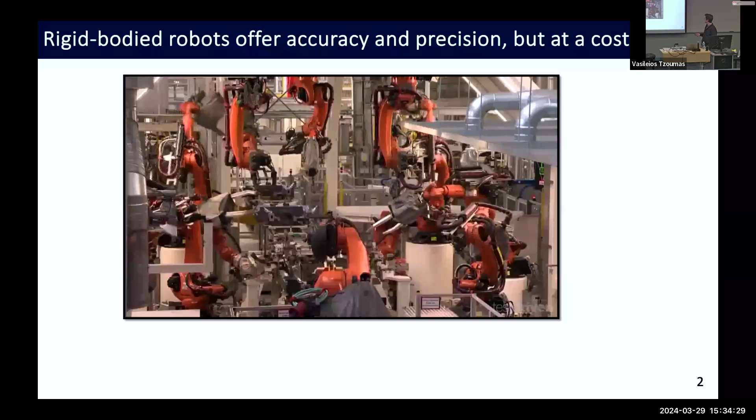But those same robots, if they malfunction in the presence of a human, have the potential to cause serious harm and injury. So practically speaking, in these industrial settings, we physically separate the robots from the humans so that things like this don't happen.

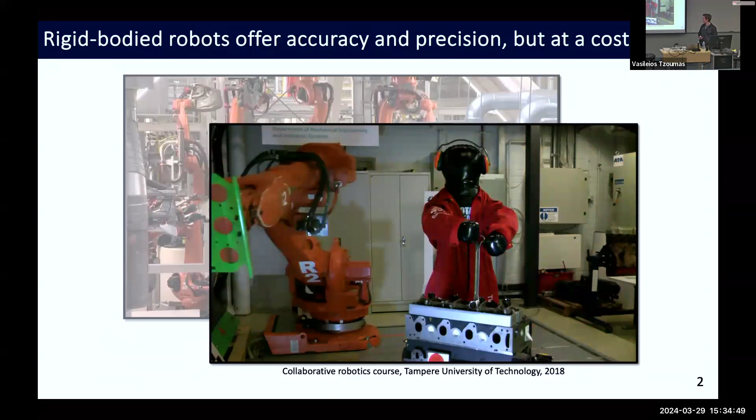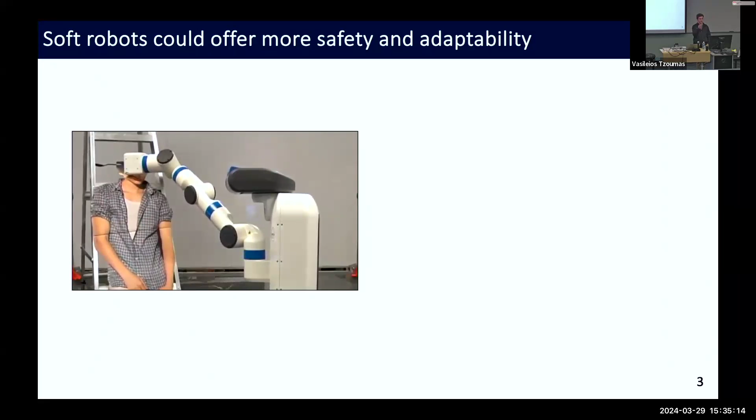But of course, if we want robots to help us in our day-to-day lives and automate things outside of the factory floor, we need them to safely operate side-by-side with humans. So again, if we take a rigid-bodied robot with low backdrivability and try to do a task like feeding someone, if the robot has a perception or control error, it has the potential to injure the person it's trying to help.

A different way of constructing robots could be to make them out of soft, compliant materials, so that even in the event of catastrophic controller failure like this, you don't have to worry about the robot causing serious harm to the person it's operating with.

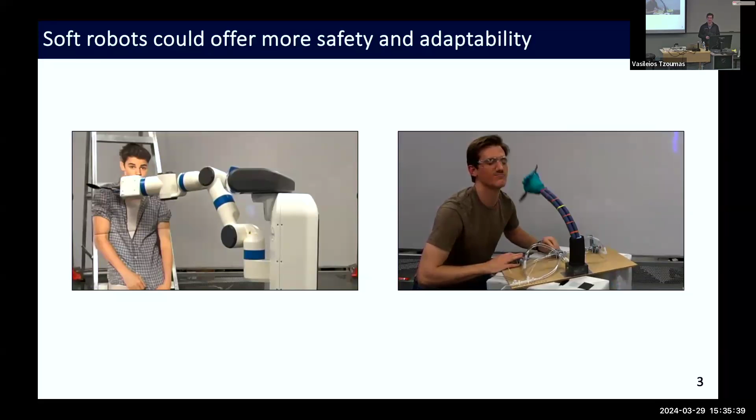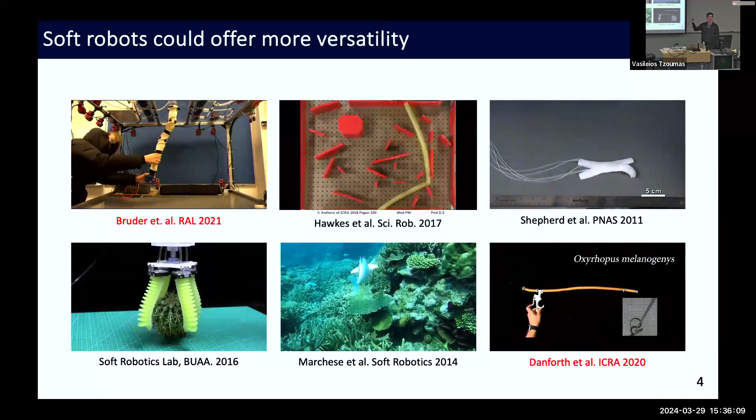So safety is one big potential application for soft robots, but that's just scratching the surface. There's also a lot of tasks that compliance is helpful with, where soft robots have the potential to do better than rigid-bodied robots. Beyond just interacting with humans safely, they can do things like navigate through their environment through physical touch, things we usually try to avoid with heavy rigid-bodied robots.

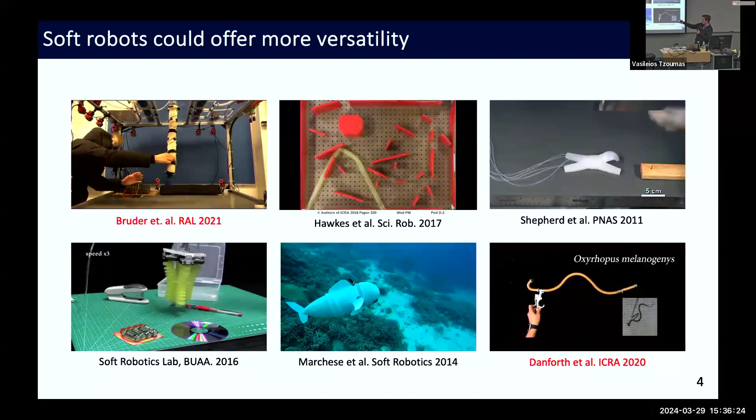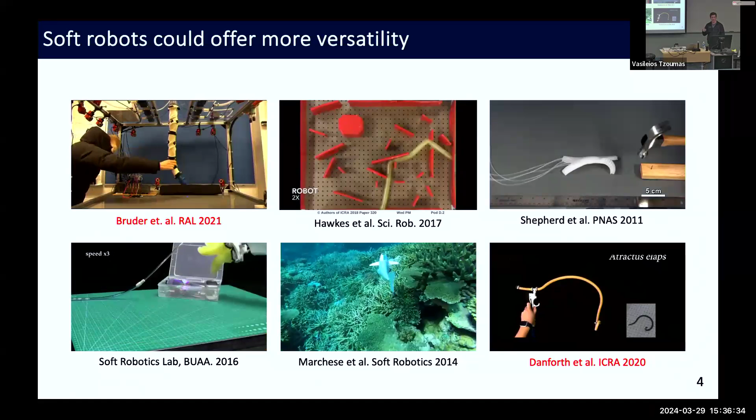They can absorb impact without taking damage. They can conform their shape to various geometries in their environment to do things like grasp a bunch of different objects without any difference in their controller. And they can more easily mimic the types of continuous morphologies and motions you see in biological systems like fish and snakes.

So with all these potential benefits out there, why don't we see more soft robots in our day-to-day lives? I'd argue probably the biggest reason is that they're really difficult to control. There's a few reasons for that.

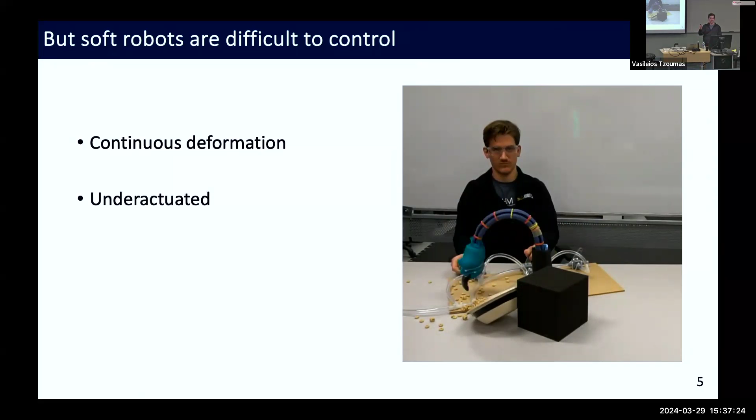One is that rather than having their deformation localized at joints the way we do with traditional robots, their deformation is distributed across their body. So they have this continuous shape, which makes it hard to easily parameterize with just one or two numbers or joint angles. And because they have this continuous deformation, they have essentially infinite degrees of freedom. So you're always going to be under-actuated, because you can't have infinite actuators in your system. That presents another challenge.

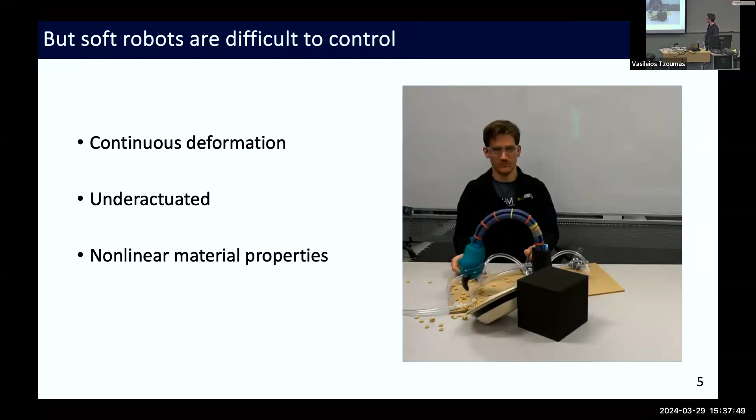And then they're made of soft materials, so you can't make the rigid body assumption we typically do when controlling mechanical systems. You have to account for nonlinear material properties. So those are the reasons why it's challenging to model and control soft robots.

The approach I'm going to talk about today is a data-driven approach to try to make it easier to get a handle on these systems. The benefits of this approach are that it allows us to construct accurate linear representations of the dynamics, and these are global linear representations, not just linearizing about a single equilibrium point.

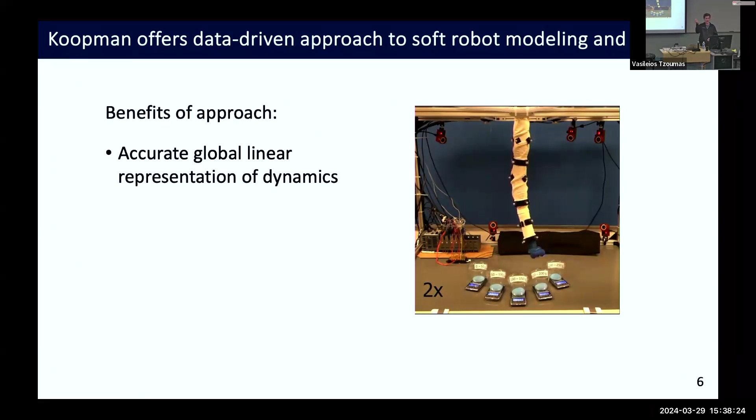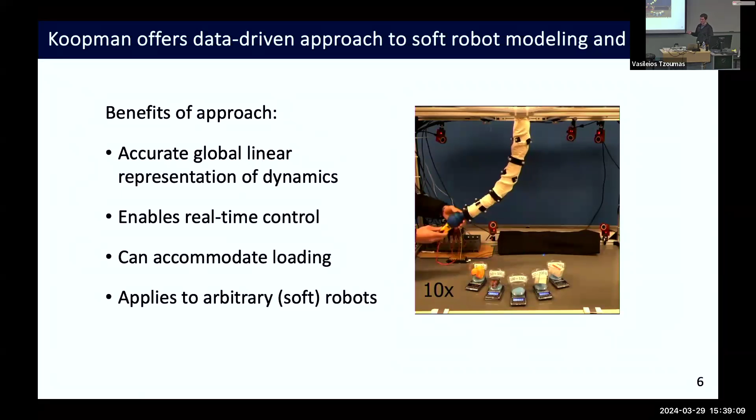Because these models are linear, it lets us use efficient linear control methods on them, enabling real-time feedback or optimal control. We'll also show extensions where we can accommodate loading in our models, which isn't too hard because of the linearity. It's nice because, since it's data-driven, it applies to arbitrary dynamical systems or robots. In our case, it works for soft robots with different morphologies, though in this talk you'll see it mostly applied to trunk-like manipulators like this one.

So that's what I'm going to talk about today: the Koopman approach to soft robot modeling.

I already talked about why soft robots are difficult to model from first principles, so it's hard to construct physics-based models of them. But they're actually particularly amenable to data-driven methods.

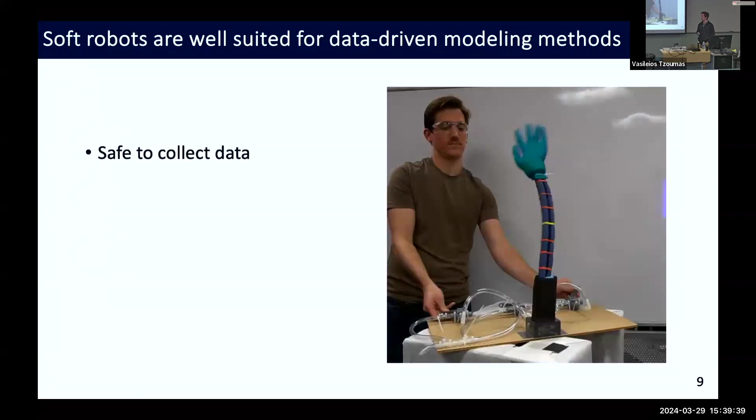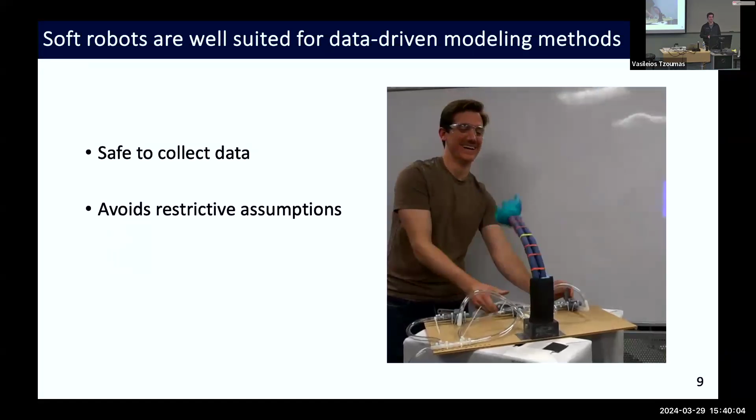One reason is that it's relatively safe to collect data from them. You can command a soft robot like this one under randomized control inputs with minimal risk of damaging the robot or your surroundings. In other words, collecting data is cheap, whereas if you imagine trying to collect data from an autonomous vehicle by letting it run randomly through town, it wouldn't be as safe to do.

Another benefit is that this lets us avoid making the simplifying assumptions we typically have to make with physics-based models — assumptions that make the models tractable but also less accurate for the particular system we're trying to model.

It's also really important for these soft robotic systems, which are typically handmade in the research lab by tired grad students, and tend to have fabrication defects that make two robots supposed to be the same actually behave somewhat differently because their dynamics are affected by those defects. With data, you're learning the dynamics of the system itself, so even with fabrication defects, the data-driven model can account for those.

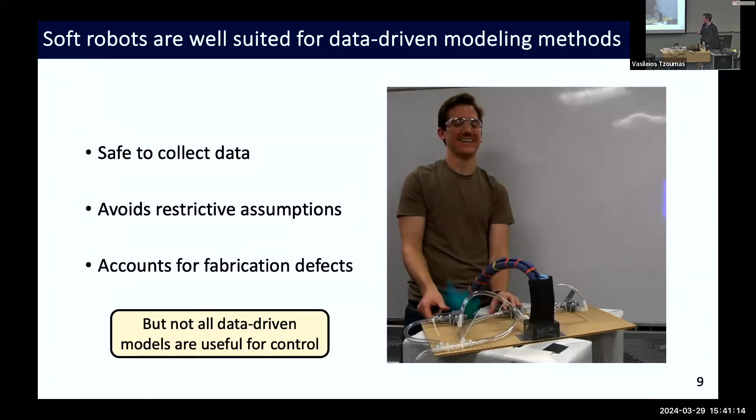So these are reasons why soft robots are amenable to data-driven techniques. But of course, not all data-driven models are great for control — we can get accurate predictions, but for control we actually want more than just accurate predictions. When I think about my ideal control-oriented model, there are two main traits I want: the first is that it's accurate, because if your model's not accurate, what's the point? You want it to make good predictions.

But secondly, I want my model, if at all possible, to be linear. Because, like I said earlier, if I have a linear model, I can use off-the-shelf efficient linear control methods like LQR or MPC to control my system, rather than resorting to nonlinear control methods, which are usually less computationally efficient for most systems.

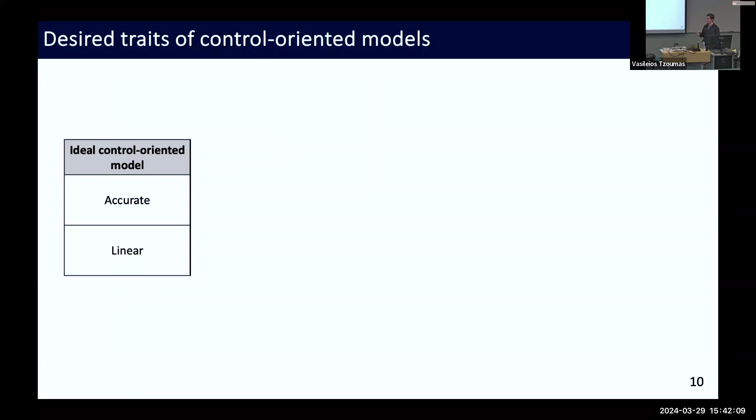If I had my system and said I just want a linear model and don't care about anything else, I could get one from data — just take the data and do linear regression to fit the best linear model I can. In that case I'd have a linear model, but if the underlying dynamics were characteristically nonlinear, I'm unlikely to get a very accurate model outside of maybe a neighborhood of an equilibrium point or something like that.

So I could go the opposite direction: say I don't care about linearity, I just want the most accurate predictions possible. We've seen with deep learning and training neural networks that it's possible to make really good predictions for many systems — if you have enough data, you can represent almost arbitrarily complex patterns with neural networks. But then, of course, you're sacrificing that linear structure; the neural network is generally not a linear object.

So the real strength of the Koopman-based modeling approach is that what you get in the end is something accurate — or at least in the examples I'll show, you can get accurate predictions from them — but you still get this linear representation of your system. So it combines the two things I really want in most models.

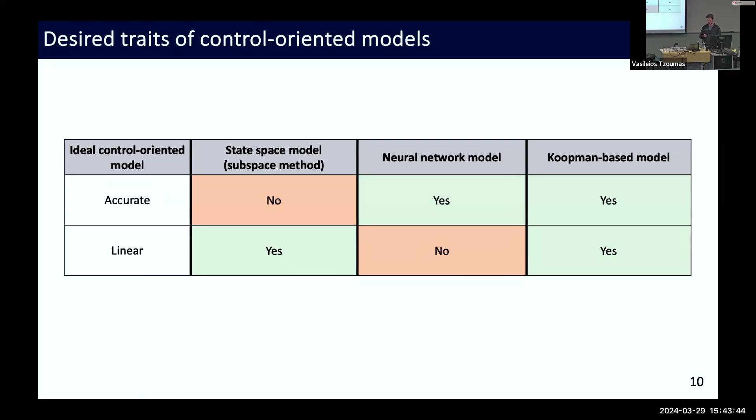So how does this actually work? I think before diving into the definition of what the Koopman operator is, it's useful to think about it conceptually, what it does for us, using an analogy from machine learning. So take, for example, the case where we're trying to classify unlabeled data points.

And we have a set of labeled data points to train our classification on. If I have a set of data points where some are labeled red, some are labeled blue, distributed the way I've shown here, I could separate them by a line. So I could draw a linear boundary in my feature space, and my classification algorithm can be written as a linear program, which is great. It's efficient, easy to implement.

Okay, but now let's say my data points are distributed differently. Now they look more like this, where I have red points concentrated in the middle, and blue around the outside. So now there's no single line I could draw that would separate the red and blue points. I could either draw a bunch of lines and take the intersection of them, or draw a circle boundary, which is a nonlinear boundary. In this case, I can't write this as a linear classification algorithm, which is a bummer because I really like linear algorithms. They're nice and easy to implement.

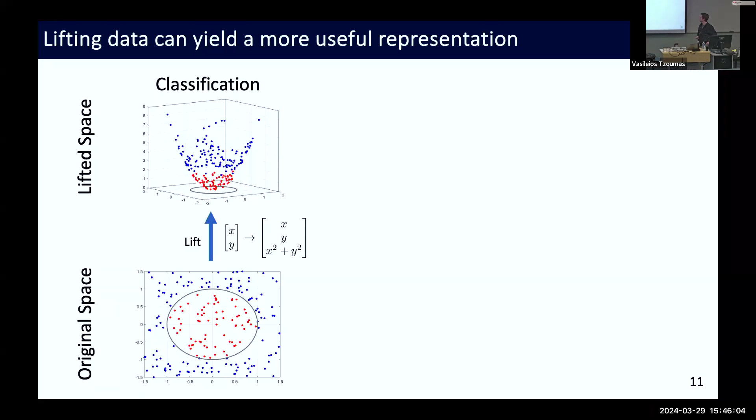So the idea is that we can take this set of data points, and by lifting it into a higher dimensional space, we can recover a representation of that data that lets us draw a linear boundary between the points. In this case, I define a third dimension for these points as x squared plus y squared, which puts all my points on this paraboloid in 3 dimensions. Now, if I want to separate the red and blue points, I can do it with a plane, which is a linear constraint in the higher dimensional space. So I'm back to being able to use a linear program to classify my data points. The idea here is that by increasing the dimension of my space, I can get a representation that is better for the task I'm trying to achieve, which in this case is classification.

So the Koopman operator is the same idea, but applied to dynamical systems, where I start out with a nonlinear dynamical system in my state space, and by lifting it into a higher dimensional space, I can get a version of that system that can be described by linear dynamics. So I can describe that flow with a linear system.

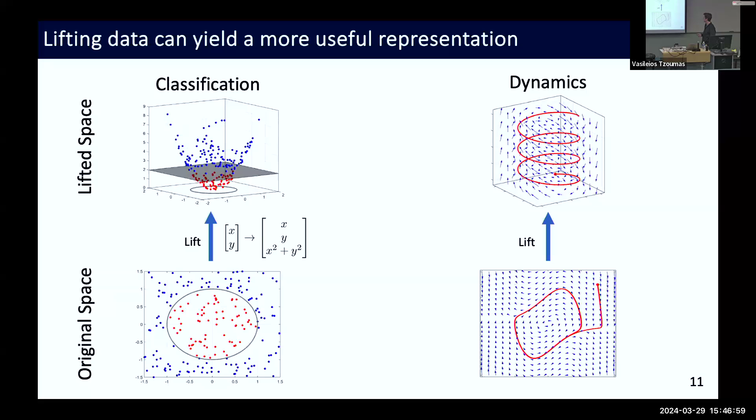So now what actually is the Koopman operator, and how does it do this for us? To see that, consider just an arbitrary nonlinear dynamical system, which we can represent with a continuous ordinary differential equation, or the discrete flow map, which basically takes states and flows them forward one discrete time step at a time. If I plot a trajectory of this system starting from my initial condition x0, I flow it forward one time step, and I can do that repeatedly to build up a trajectory of that system in the state space.

So now let's introduce the Koopman operator. The Koopman operator is also called the composition operator, because the way it's defined is that it takes functions defined over the state space, in particular scalar valued functions, and composes them with the flow map of the underlying dynamical system. So that's what the Koopman operator does - the operation composes it with this phi function.

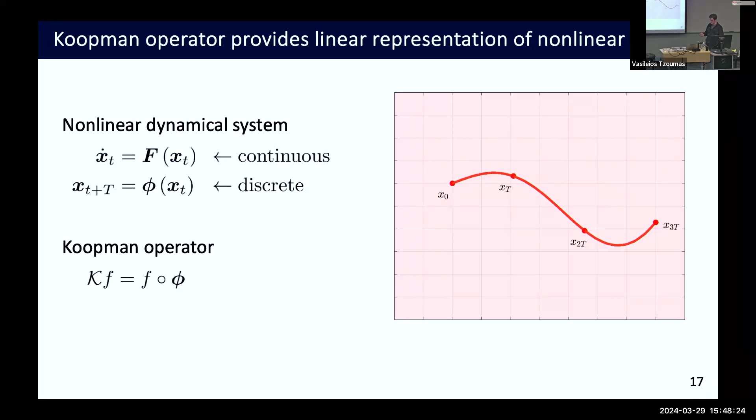So visually, what that looks like is if I have some real valued function f defined over my state space, and I evaluate that function at my initial state, if I apply the Koopman operator to that function, it gives me the value of the function one time step later along the trajectory of the underlying dynamical system. And if I repeatedly apply that Koopman operator - this is a linear operation - I can basically advance the value of this function forward in time. And if I know the relationship between that function and my original state, I can recover my actual predictions of the state forward in time. So in this way, it lets us advance the value of our state through a linear operation.

And so I showed this example for a system with no control inputs, but it can also be applied for systems that do have a control input. Typically the assumption we make is that the control input is held constant between time steps. So that's just a caveat there.

The question you should be asking now is: if you're telling me that I can take any nonlinear system and represent it with a linear system, doesn't that solve all of controls? Can't we just do everything linear? And the answer is no, because this definition of the Koopman operator assumes that it's an infinite dimensional object.

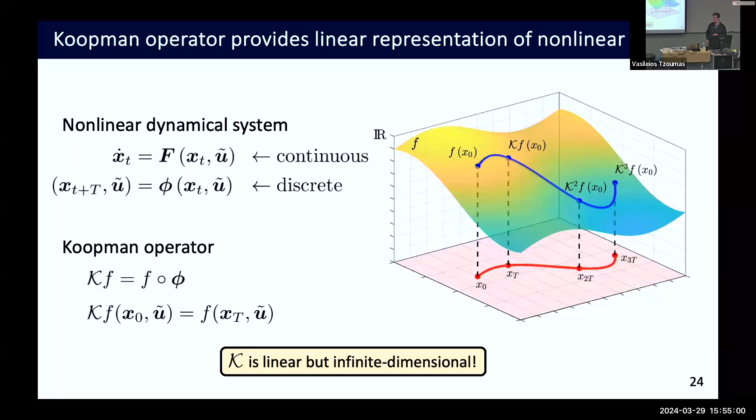Okay, so in practice, we have to approximate the Koopman operator in a finite dimensional subspace. A way to do that is we choose a finite set of basis functions to define a subspace that we're going to define the Koopman operator over. Once we have the set of basis functions, we can represent any function in that subspace as a vector, as a weighted sum of all these basis functions.

So we can represent it just as a vector of coefficients, and likewise, we can represent the Koopman operator as a matrix. This is the definition of the Koopman operator from the previous slide, replaced with this new matrix vector notation. What we see is that this holds for any vector in the space, so we can cancel C from both sides, and we end up with an equation saying that the transpose of this finite dimensional Koopman matrix will flow the value of the vector of all basis functions forward one time step.

Essentially, this Koopman matrix acts as a discrete flow map on a lifted state, where that lifted state is a vector containing all of our basis functions evaluated on the lower dimensional state.

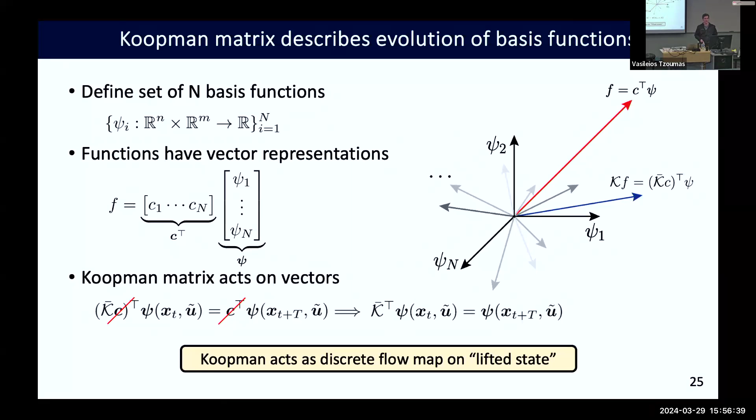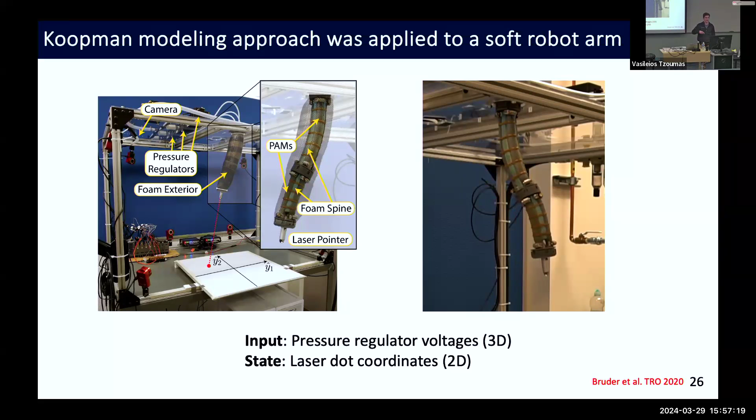So that's the idea, but how do we actually take a real system and identify a Koopman operator for it? To walk through those steps, I'll use this example of a soft robot, which consists of two bending segments controlled by three pressures. These are pneumatic actuators, so three pressures go in to determine the motion of this robot. The output is the position of a laser dot on a sheet mounted below it. So we have a three-dimensional input space and a two-dimensional output space.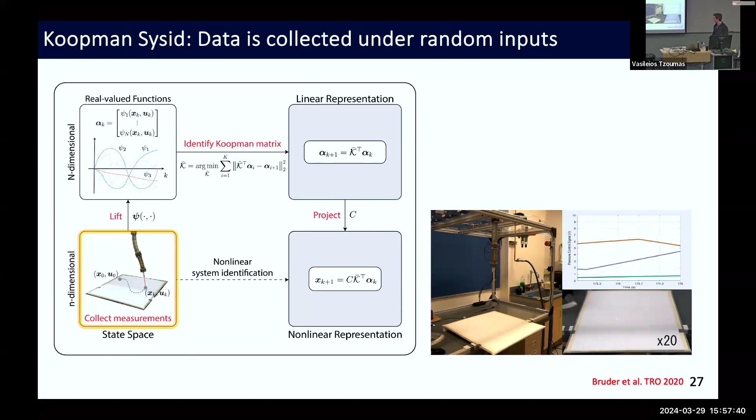And so the process goes like this. We start by collecting data. We have a set of randomized, linearly interpolated control inputs, and we measure the input and output of the system over a bunch of data points.

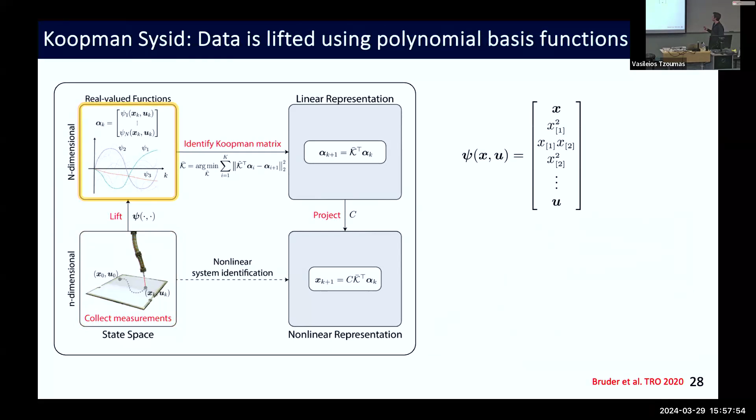Then we take that data and lift it into a higher dimensional space spanned by a set of basis functions of our choosing. In this particular case, we used monomials up to degree 2 as our basis functions, and then we appended the input as the last M set of basis functions.

And this speaks to your point. We did that so that in the end we end up with a linear... I shouldn't say controllable, but a linear system with the control input where we want it. So I'll use a shorthand Z to be the vector of all of these non-input states.

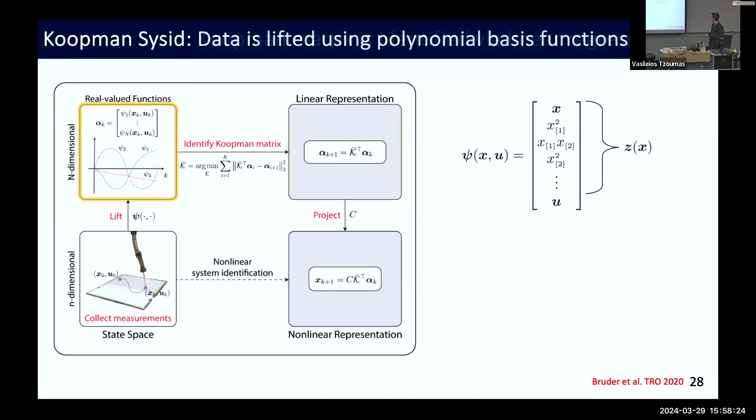So then once we have those lifted data points, we can identify this Koopman matrix through just linear regression. We find the matrix that best describes the one-step transition between consecutive lifted data points over the whole set of data points, and we end up with a matrix that looks something like this.

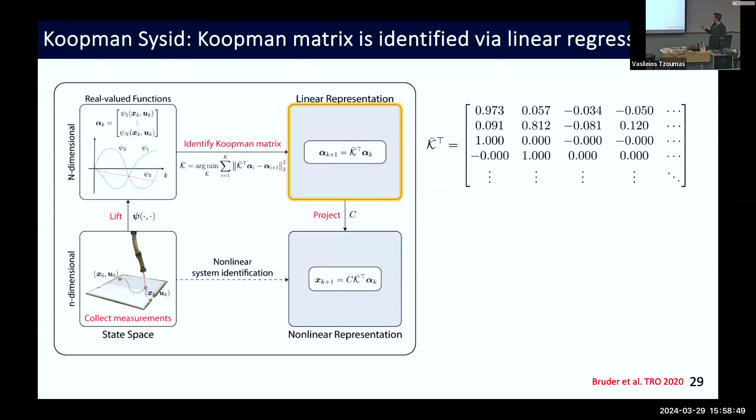So I can either take that matrix and decompose it into an A and B matrix so that I get a linear time invariant system of my lifted state Z, or if I want to, I can project it back down into the original state space, and I end up with a nonlinear representation of my system as just a weighted sum of the basis functions. So even if I'm not interested in doing linear control, this is a way of doing nonlinear system ID without solving a nonlinear optimization problem.

You had a naive question. At the beginning, you gave this nice trade-off of linearity versus accuracy, and you discarded neural networks because they're not linear. At the end of the day, it's nonlinear in the state, linear in the input. So what if I just said what I want is linear in the input? Is it actually... how should I phrase this? If I had just said x of k plus 1 is some function of x of k plus B times u, it's nonlinear in the state, but affine in the input.

So you could certainly do that, but for doing something like model predictive control, we're trying to optimize over a finite horizon of states and inputs. We actually use the linearity in the states as well as the linearity in the inputs to do that. But it's like a hidden efficiency, I guess, right? Because the states are not... all the entries of Z are not independent of each other. And maybe that'll become clear in the rest of the talk. Yeah, okay, that's right. All the entries of Z are not independent of each other.

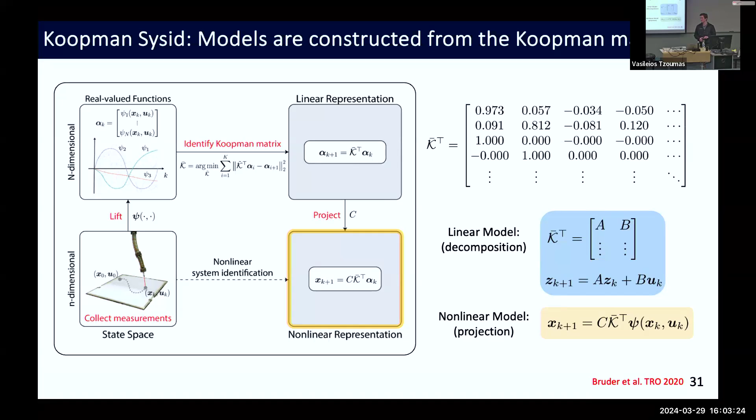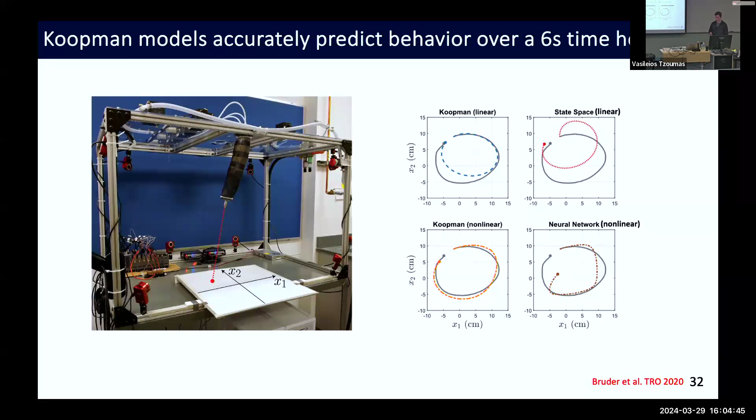So that's just to say these models can generate accurate predictions that are on par with other methods. But like I said, the true benefit from a control standpoint is not just that they give you predictions — there's lots of ways of getting models that give you good predictions. It's that they give you a linear representation.

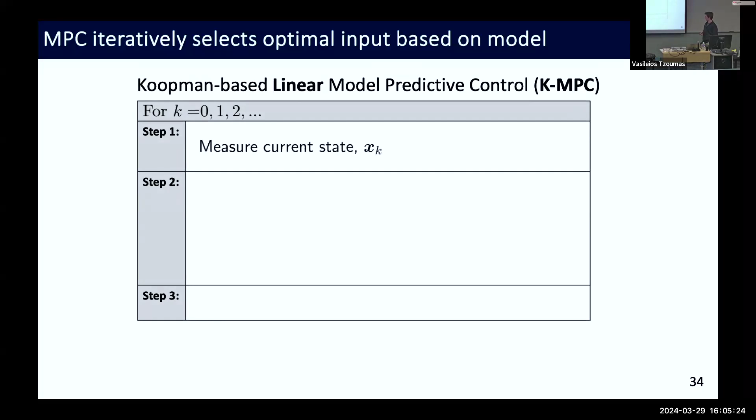And so we took this model and put it into a receding horizon model predictive controller to control this robot. For anyone who isn't familiar with MPC, basically the way that works is at each time step of the system, we're measuring the current state, in this case the position of a laser dot. Then we're solving an optimization problem that minimizes a cost function, usually something that penalizes deviations from a desired trajectory.

We're minimizing over lifted states and inputs, and enforcing that the sequence of states and inputs has to be consistent with our linear dynamics, and that it starts from the right initial condition. Then we solve that, find the optimal sequence of inputs, and apply it for one or sometimes more time steps before replanning. So we're finding a sequence of inputs for a horizon of NH steps — in the example I'm about to show, we planned for like 20 or 30 steps, something like that — but we only applied the first input in that sequence before replanning.

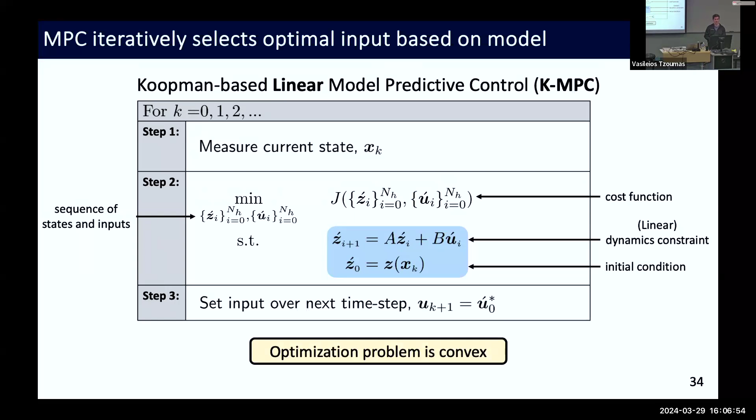What this linearity gets us is that because we have a linear system, the constraint here is linear, and this becomes a convex quadratic program — I didn't say this is a quadratic cost function. It makes this optimization problem convex, and then we can solve it using efficient convex solvers, and we have a global convergence guarantee because of that. So it lets us do this replanning MPC in real time, at about, in this case, 40 hertz or so.

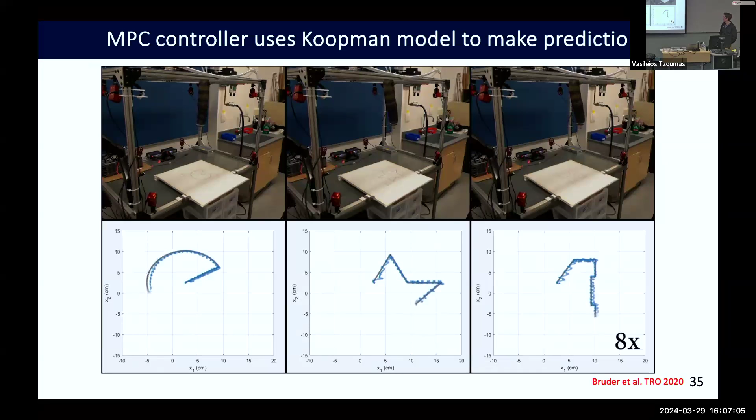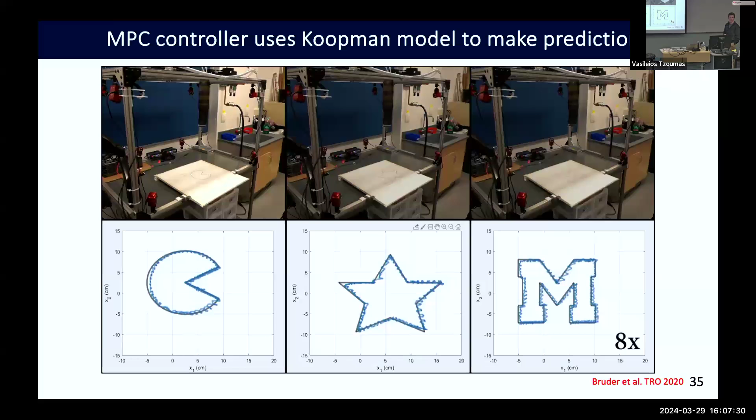So here are some examples of trajectories we followed using this MPC controller with the laser dot. It's important to know that none of these trajectories were present in the training data set. The training data was just the laser moving all around. We didn't train it to draw these shapes.

We just built a model that could predict the input-output relationship and then used MPC to draw these shapes. And if we compare that to doing the same linear MPC, but with the state space model trained on non-lifted data, we get much better results, especially far away from the hanging equilibrium point for the Koopman MPC system.

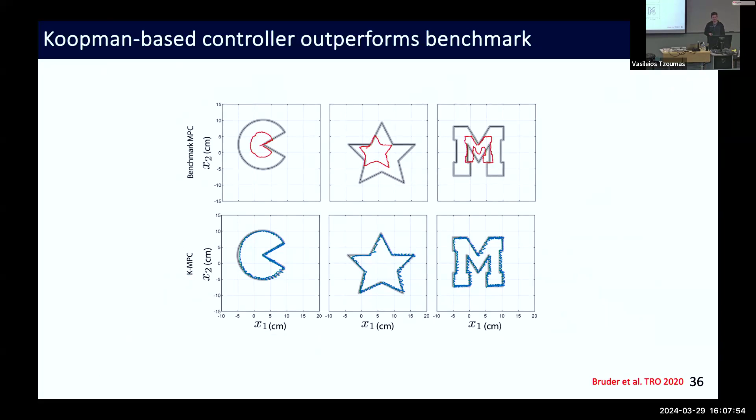So that was sort of the first example where we applied Koopman to a soft robot, and it was a pretty simple system.

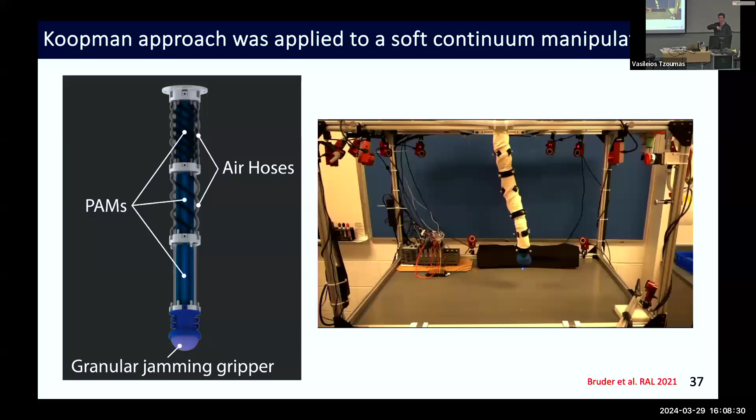What we wanted to see next is, can we apply the same technique to a more capable soft robotic system, something that might be able to do pick and place tasks. So we built this soft robot arm that has a gripper at the end effector and has 3 independently controlled bending sections, so it's able to bend each segment independently. We basically just applied the exact same technique, learning a Koopman operator from data for this system.

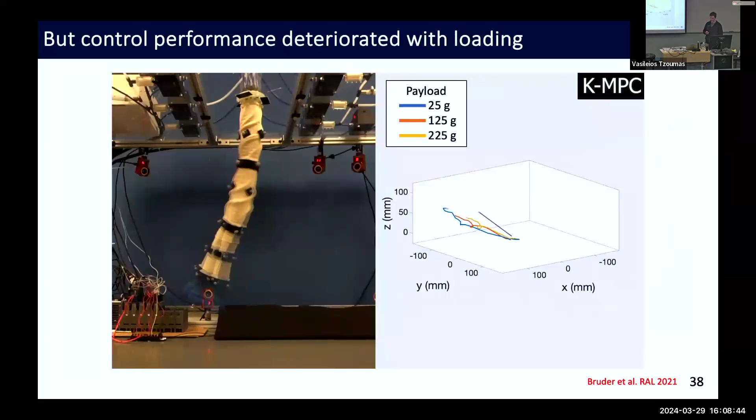But we tried seeing the results of control when we put different payloads at the end effector. So here we have a simple reference trajectory of just lifting and then drawing, tracing out a circle. For these 3 different payloads at the end effector, we see that for the small payload, it overshoots the trajectory, it lifts it too high. And for the heaviest payload, it doesn't lift it high enough.

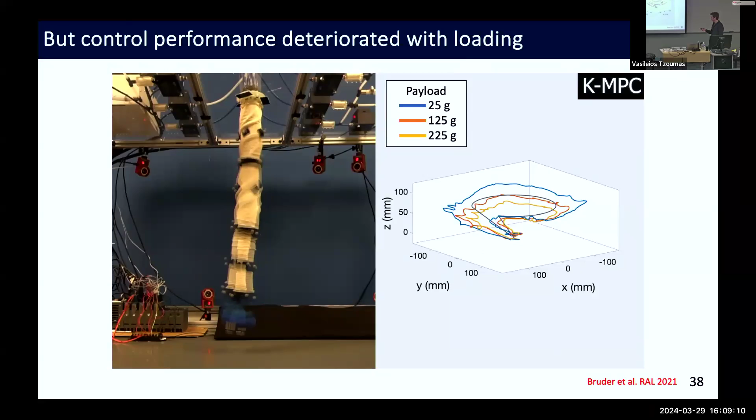That shouldn't really be that surprising, that the performance varies a lot with payload, given that soft robots, because of the compliance of their bodies, deform a lot under loading. So with a data-driven model that doesn't take loading into account at all, we saw wide variability in our controller's performance with a payload. That's obviously a problem if you want to build a robot that can actually do tasks, because you don't want your robot's performance to be totally different depending on what it's trying to hand to you.

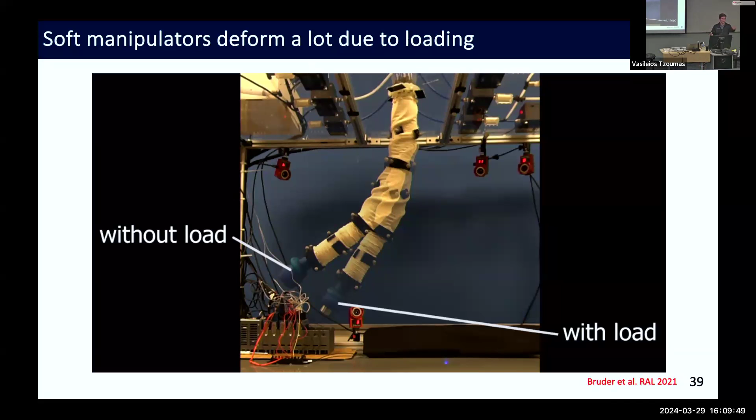So what we wanted to do is incorporate this loading into the model somehow. The way to do that is we can actually just incorporate the payload into our set of measurements, and then also incorporate it into our basis functions. Then when we do that, what we get in the end is a linear model, but one that has this explicit dependence on the payload.

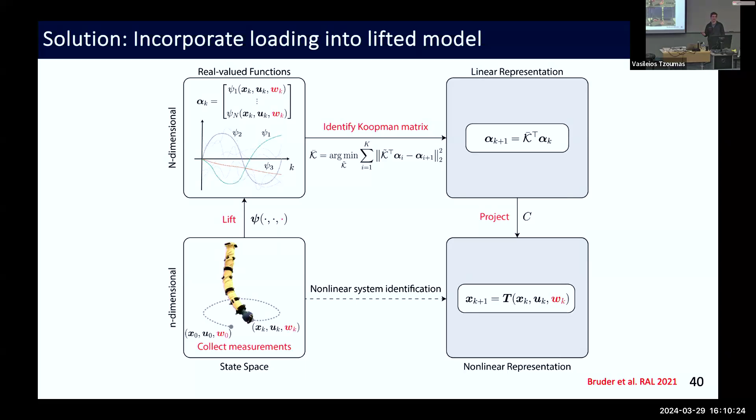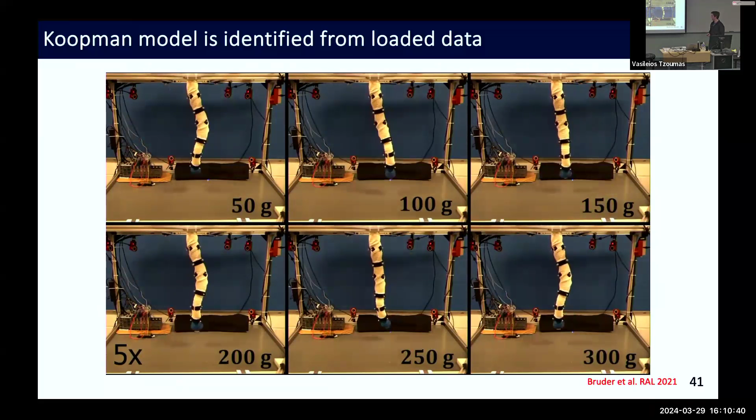So in practice, we measured the response of the system, or collected data under random inputs, for a set of different payloads at the end effector. Then we lifted that and constructed a payload-aware model, basically.

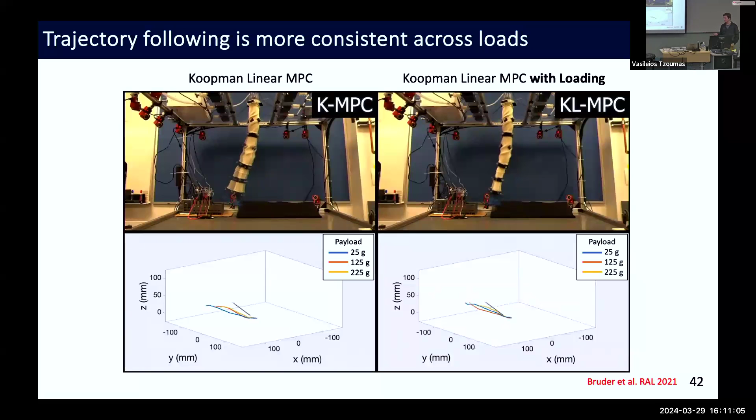So then we can compare. On the left side is the video I already showed, and on this side is the same test, but now it has the payload basically baked into its Koopman model. What we'll see is that the version on the right has a much less spread between the 3 trajectories. They're much closer to the actual desired reference trajectory with the load incorporated into it.

Are you still using just the lifting of the end effector here, or are you using all the markers on the thing and lifting everything? What is the logic? No, we're using all — actually, we're using more than just the markers at the end effector. I don't remember exactly; Shun might remember better than I do, because he was the one who set up this experiment. We put all the markers on there, but I think in the end we may have just used 3 sets of them. But we were lifting the position of more than just the end effector in this case.

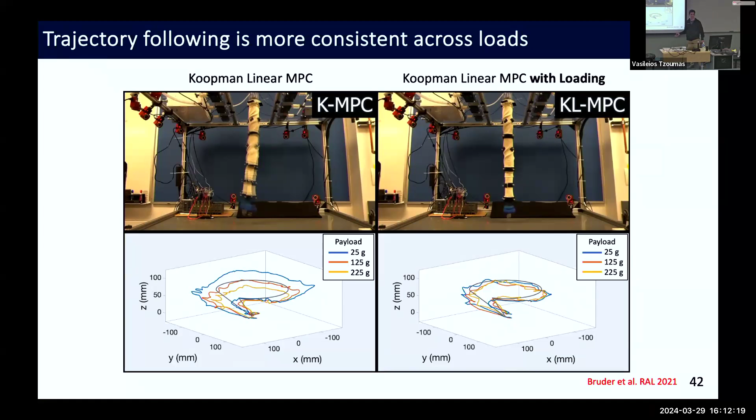Okay, let me go back to this. So this is an improvement, but of course, this only gets us about halfway there, because this controller assumes that the end effector payload is known. Like this controller, we told it whether it was holding a 25, 125, or 225 gram payload, so it knew how to adjust its control. But really, we want it to be able to adjust for that on its own, without us having to tell it.

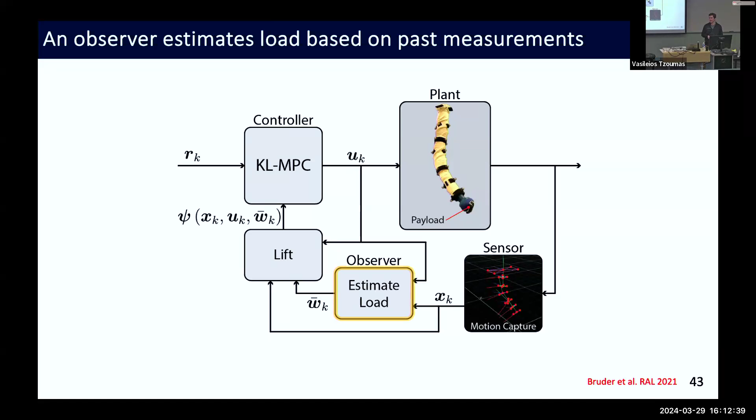And so here's another case where the linearity of the Koopman model comes in handy, because we could basically put a linear observer into the feedback loop that would, during operation, update an estimate of the payload at the end effector based on the learned dynamics. So here's an example for these 3 different payloads: as it moves the weight around, it can kind of figure out what the payload is.

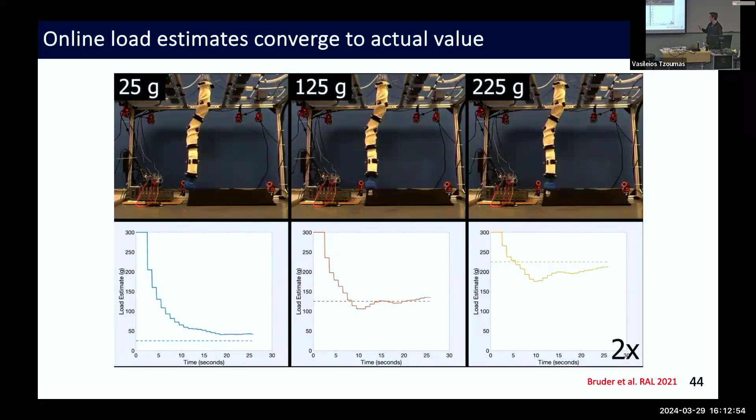So with those two things solved, we now have a way of estimating the payloads online, and a way of accounting for them. We were able to perform a task that involved picking up an object of unknown mass, moving the arm around to estimate the mass of that object, and then placing it in the cup corresponding to its mass, doing that repeatedly for a bunch of different objects.

To do this task successfully, it needed to estimate the mass of the object within a 50-gram range, and position the end effector within a circle in the XY plane of radius about 4 centimeters. Not the precision you'd see in robots building your car, but for soft robots, at the time of this publication, as far as I know, this was the first demonstration of a soft trunk-like arm doing this type of automated pick and place with unknown objects.

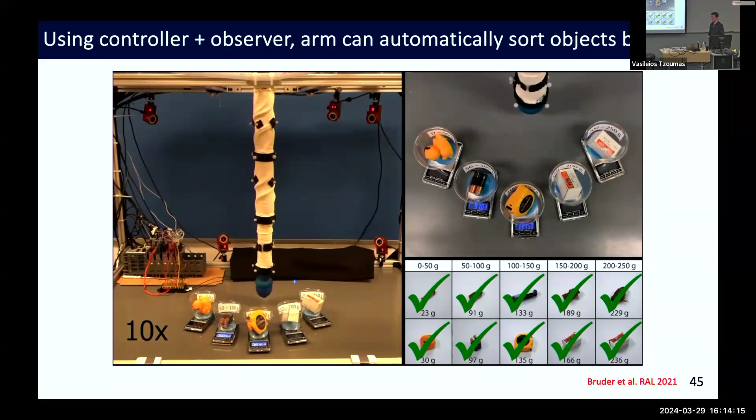So up until this point, I've basically just been saying that data-driven is great for soft robots, that we can do everything by just learning it from data.

And of course, there are downsides to doing everything from purely data. One is that the more complex your system is, the larger your data requirements are in order to identify good predictions for that system. And again, your model is only based on what it has seen in its training data, so if you're trying to operate your system away from the dynamic range and states it has seen, you're probably not going to get good predictions unless you're lucky.

So the question we had was, could we construct more generalizable models with less data? Is there a way we could still stay within this Koopman operator framework, but get better, more generalizable models with less data? And the answer is yes, there's a way to do that. It's basically taking this idea of residual modeling and applying it within the Koopman context.

So what I can do is identify a lifted Koopman model by starting with a Koopman matrix that's based on a physics-based model, and then supplement it with a data-driven model that models the residual, the modeling error of our physics-based model. Then we have a weighting factor that tells you how much to weight one of these over the other based on what it sees in the data.

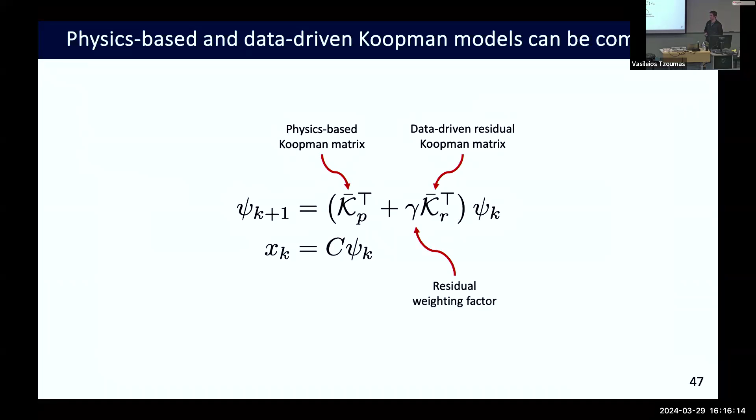So let's see how I'm doing on time. Yeah, I can go through this. I may go a little fast, but the big ideas I think will be fine.

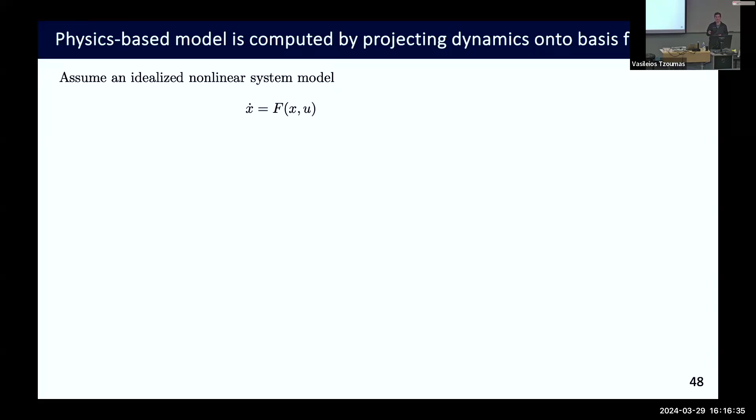We'll come across. So the first thing is, how do we construct a physics-based Koopman model? So far, I've said the way you construct a Koopman model is to do linear regression on data. But if you have an idealized dynamical model for your system to start with, maybe it's not super accurate because you had to simplify things to get it, but if you have this to start from, you can identify a Koopman matrix by, just like last time, identifying a subspace in which you want to learn the Koopman operator.

And then instead of doing linear regression on data, you can approximate the derivative of each of these basis functions by projecting that derivative onto each of your basis functions. So this is the inner product over a norm, and that serves to project psi-i-dot onto psi-j. And then you do that for all the basis functions. When you do that, your dynamics of the lifted state can be represented by this matrix of these projection coefficients.

So I'll call that G bar here, because in this case, this is the continuous version of the dynamics. And so we can get a discrete version of the Koopman operator, like what I've been using in the other parts of this work, by taking the matrix exponential of that. Okay, so that's the first part.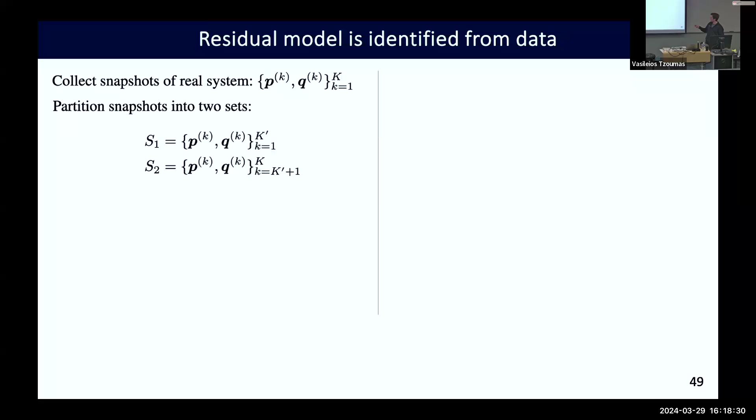Then to get the data-driven component, we collect data from the system. So we still have to collect data. We partition that data into two different sets. The first set is used to identify a data-driven Koopman matrix the same way we did in all of the previous systems, finding the matrix that best describes the one-step transition between those lifted data points.

But then what we do is define our residual Koopman matrix to be the difference between the data-driven Koopman matrix and the physics-based one. And then we use the rest of the data points to find the best weighting factor for the residual part of the Koopman matrix. Essentially, this gamma can be between 0 and 1. If it's equal to 0, your total model is just your physics-based component, and if it's 1, your total model ends up being just the empirical component.

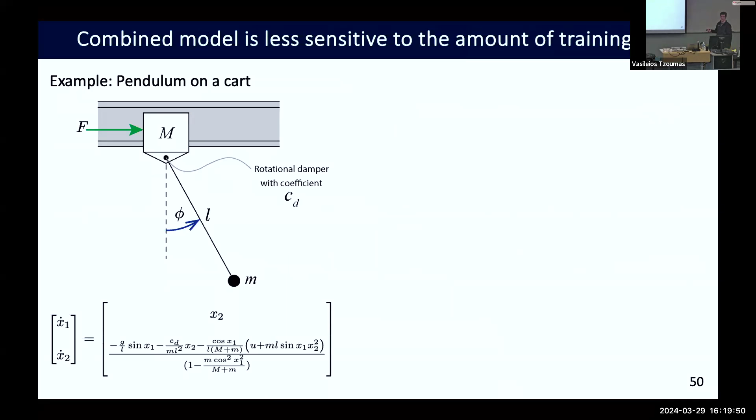So if we apply this to a simple simulated system like this, a pendulum on a cart with two-dimensional dynamics written here, what we find is that if we plot these learned Koopman models and do some validation trials, we look at the root mean squared prediction error over our validation trial.

The physics-based model doesn't change no matter how much training data we give it, which makes sense. It doesn't depend on the training data, right? It's just based on our physics-based model. Our data-driven model, however, it matters a lot how much training data we give it. It starts out with a really high error, but as we give it more training data, that error falls.

But it's not a monotonic fall, because depending on what random inputs you give it, you may get data that's better or worse for predicting the behavior in our validation trial. So generally it drops as you add more data, but it goes up and down. The combined model has the benefit that when we have low data, it basically prioritizes the physics-based model, so we still get decent predictions. But as we increase the data, we get more consistent performance across different amounts of data, so it doesn't vary as much as the data-driven model.

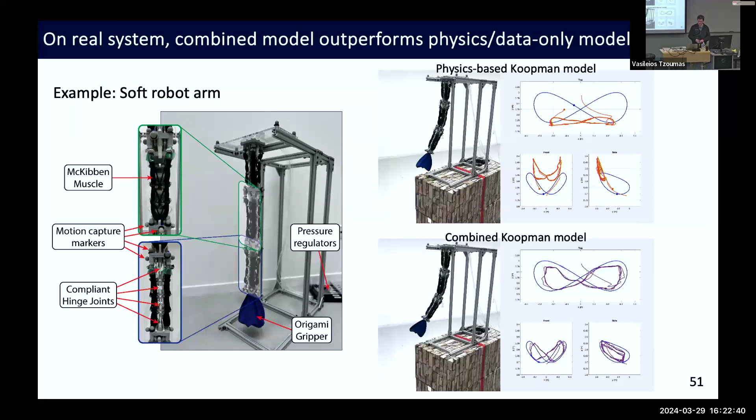So we get this tracking performance, whereas with the combined model where we had data to supplement it, we get much better tracking of the trajectory.

I'm almost done. With this combined model, we can use it to do real life tasks like a pick and place task, where the robot picks up tools and sorts them into different bins. We're not doing any estimation of the payload in this case. It's more just that we have a model that's robust enough that we can get through disturbances, so it can still work even with disturbances.

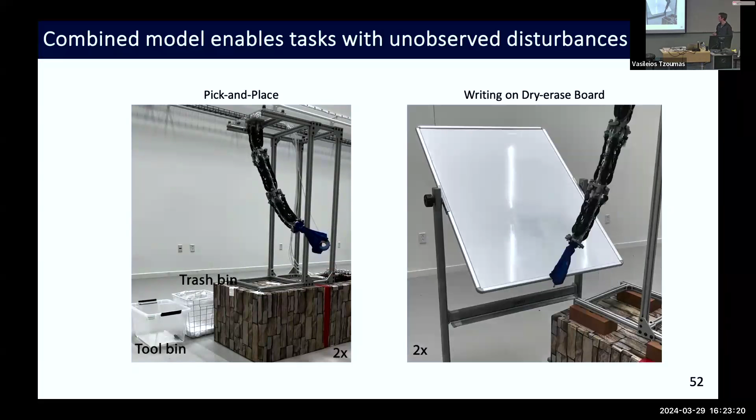Another example of this is where we have a robot arm and we want it to draw the letter H on a dry erase board without knowing the exact position of the board. The robot uses its body compliance to adapt to the constraint imposed by the board, and then uses its controller to adapt to that.

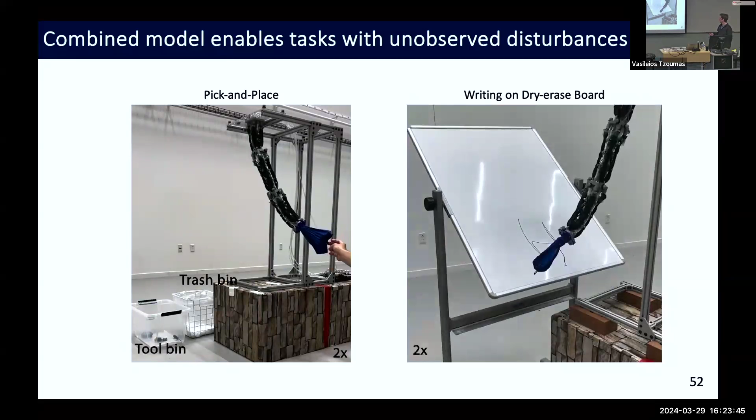Okay, so this brings me to the end of the talk. In conclusion, the takeaway is basically that Koopman methods can be very helpful for modeling and controlling systems that are difficult to model and control otherwise, like soft robots. The main advantages are that it gives you a way of constructing linear or bilinear models for some systems, which helps you do real-time control. You can incorporate other things into these systems, like observers for loading. And because these are data-driven methods, you can apply them to a broad range of different types of systems.

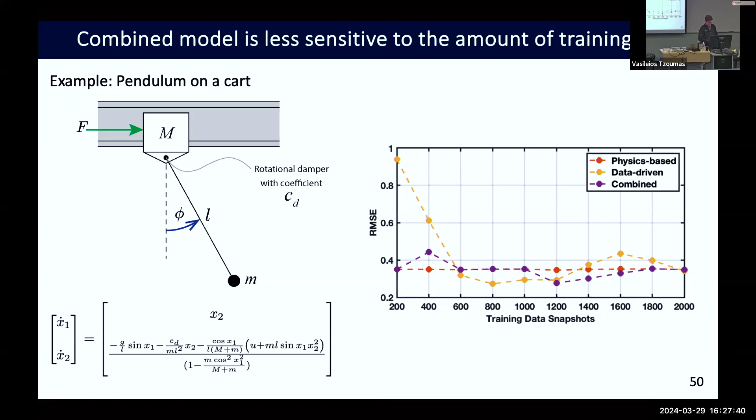Yeah, it's not just the end. Oh wait, no, I'm going the wrong direction. But there's motion capture markers on this robot as well, so it's the position of basically points along the body - this point, and this point.

I see. So we don't have embedded strain sensors or encoders in this example. I didn't go over how we built our idealized physics-based model for the system, but basically the physics-based model is in joint space. So when we want to combine the data-driven part and the physics-based part, we have to map from motion capture marker space to joint space, and we make assumptions about constant curvature and things to do that. So there's lots of physical assumptions that we make in this case.

I think that's a really big strength of this research - even though it's an infinite dimensional system, you're only tracking some finite inputs, yet you are able to do the control. I think that is pretty cool.

Yeah, and of course this system is nice in that all soft robots are infinite dimensional, but practically speaking they're stiff enough that you mostly see constant curvature segments, or more simplified geometry. So we could parameterize these infinite dimensional shapes with low dimensional approximations, and that's why these models can work. If I were to put motion capture markers on a string and fling it around, I think it would present a lot more challenges.

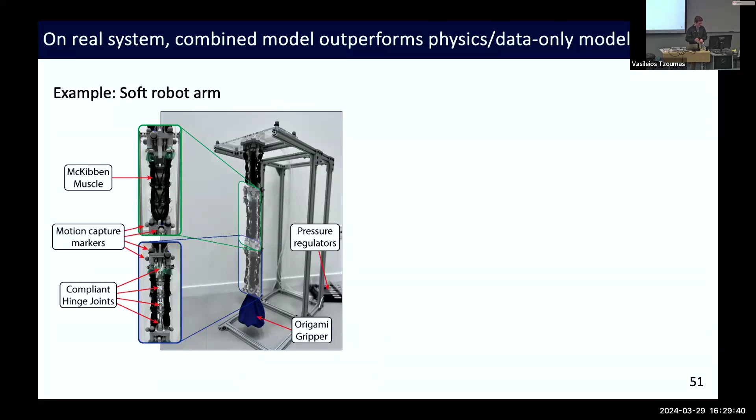Yeah, but I haven't tried. I don't understand why there's a Koopman operator associated to your physics-based portion that is not data-driven. I'm a little bit - if you go back? Sure, a few slides back. Yeah, I went quickly through that part.

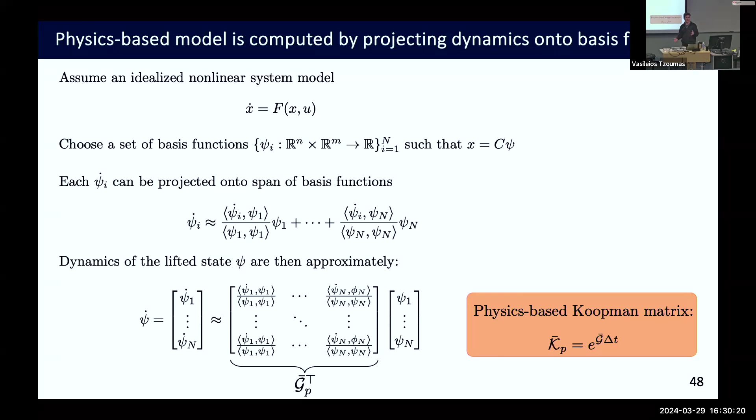This part - yes, it's really just a high-level question of what exactly is that Koopman operator, like you're weighing these different Koopman operators, one associated to this so-called residual and others, to your physics-based model. At a high level, what does each of these represent? So basically, we have an idealized physics-based model. It's nonlinear, and it can give you predictions about your system. This is just our way of taking that idealized model and putting it in the Koopman context so that we can add it to the data-driven part, and they play together nicely, and together they're still linear.

How do you create a Koopman representation for that idealized system without having data? Without data, yeah - it's by projecting these dynamics, we know what these functions are, onto the space of our observable functions, our basis functions. Okay, yeah, it's magic to me. I mean, it's not trivial - these are computing inner products in a function space.

So that's for high dimensional spaces - that's like nested integrals, so it's not trivial to compute these. What's baked in here is we're actually doing Monte Carlo integration, which is an approximate way of computing those. So we're not actually computing those directly.

A follow-up question on this: do you suspect that this weighing of these different Koopman operators would beat out some learning framework that appends a learned noise model to some known system dynamics? Why not just learn the disturbances of your system while leveraging an existing model?